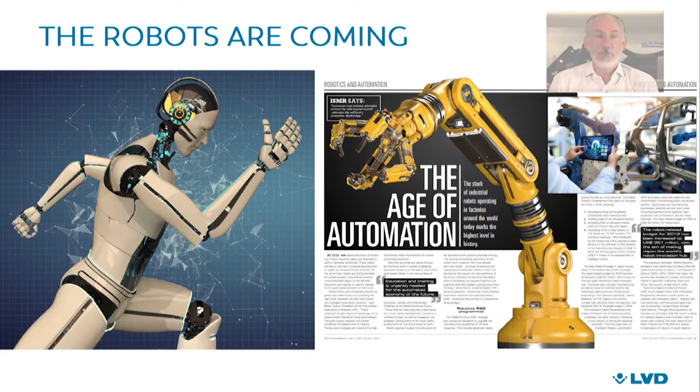The new World Robotics 2020 Industrial Robots Report shows a record of 2.7 million industrial robots operating in factories around the world. In 2019, sales of new robots remain on a high level with 373,000 units shipped globally. This means a slowdown in sales by 12% in comparison with 2018 and reflects the difficult times in automotive and electronics. But it's still the third highest sales volume ever recorded.

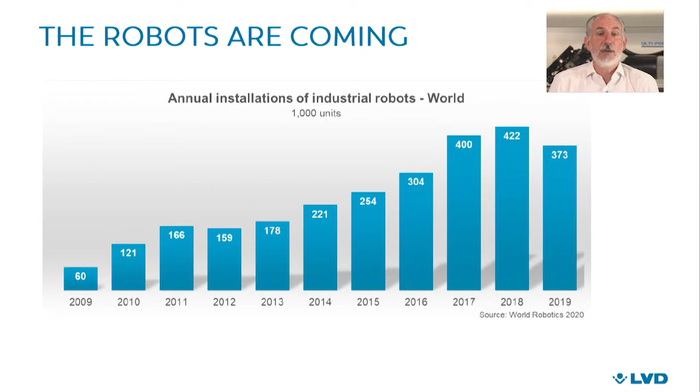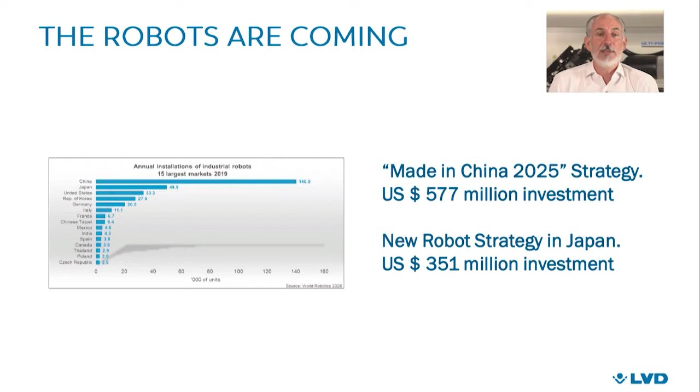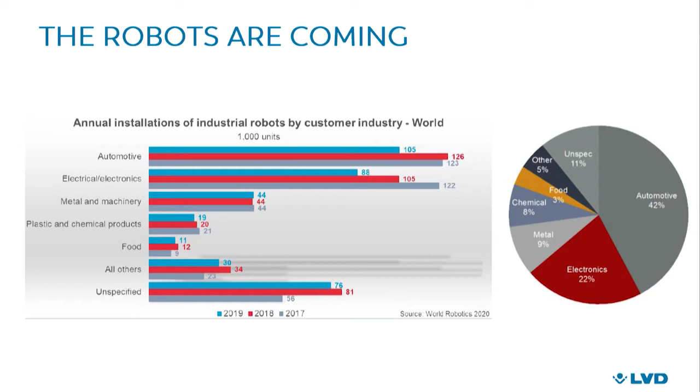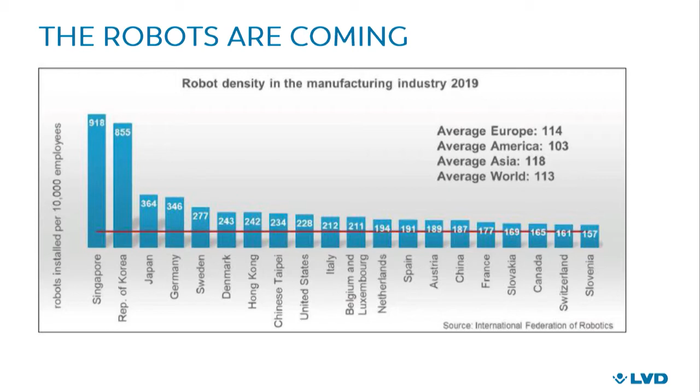Asia remains the strongest market for installations of industrial robots. China and Japan even have incentive programs in place for investment in robots being integrated into manufacturing. The annual installation of industrial robots for metal and machinery industry remained 44,000 units yearly, representing around 9% of the annual sales. The average robot density in manufacturing is worldwide 113 installed robots per 10,000 employees.

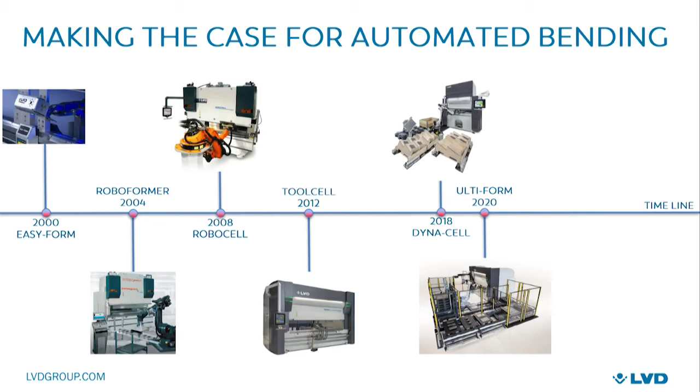All these numbers show that exponential technologies have accelerated more in the last 5 years than they have in the last 50, leading to more and more companies starting to automate. Also, LVD's journey in automated bending has been an interesting one. We have learned a lot in recent years about the demands of automated bending. So, what have we learned and what has changed over the last 20 years?

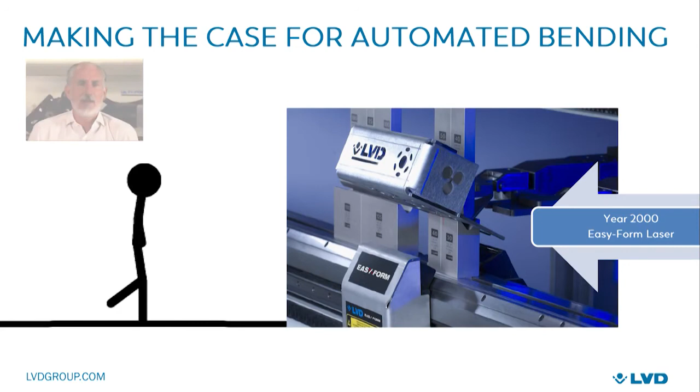In the beginning, we were all walking. Early 2000 was the introduction of LVD's Easy-Form adaptive bending system. With Easy-Form, we eliminate the problem of thickness and grain variation. Automation with inbuilt quality assurance eliminates errors and improves accuracy. In the past decades, robots have only really been seen in repetitive and high-volume applications, only practical for bigger batches due to the fact that robots had to be taught all the moves. Automation was 15 years ago all about simplifying recurring activities by letting machines and software do them for you.

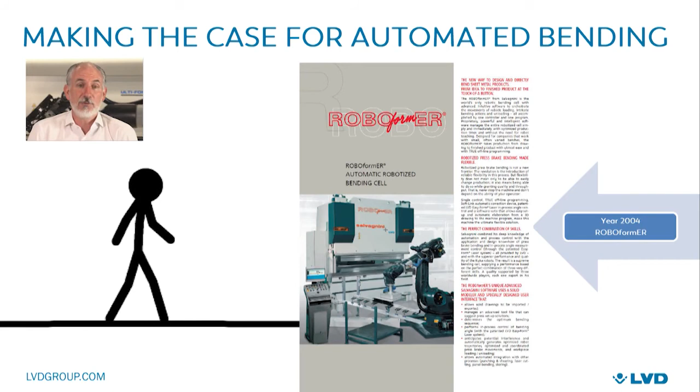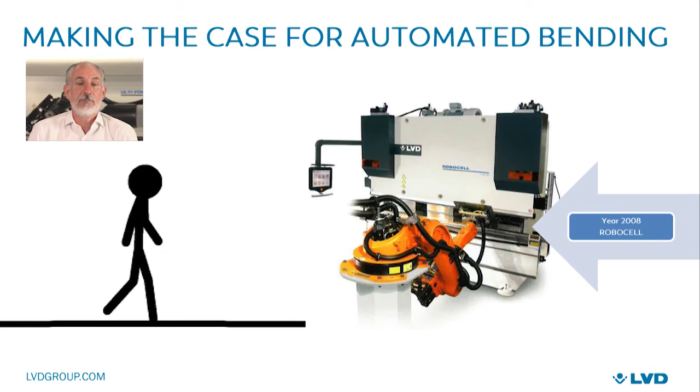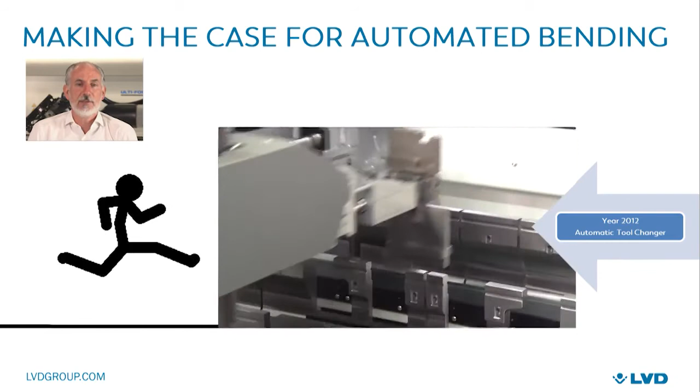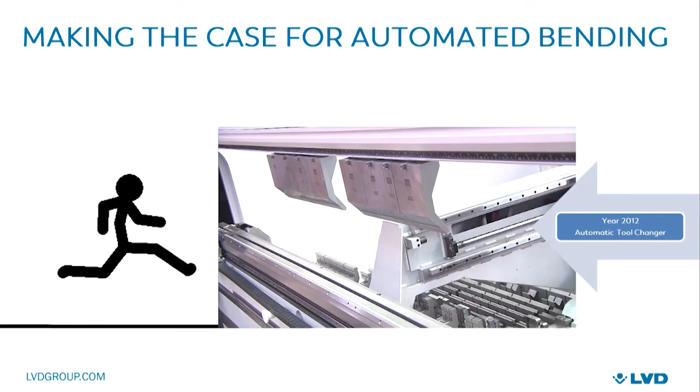What we have learned with products such as RoboFormer and RoboCell is that overall cost of the cell and having a fast and automated programming solution is vital, both points being a restriction of those products at that time. In 2012, we made a huge step with our tool cell. Executing recurring activities on a daily basis gets monotonous for employees. Automation solved this problem and allows people to take up more challenging and rewarding activities, all of this leading to employee satisfaction. Small batch, high part mix, short lead time culture has become commonplace. Our auto tool changing press brake tool cell provides the solution and improves throughput.

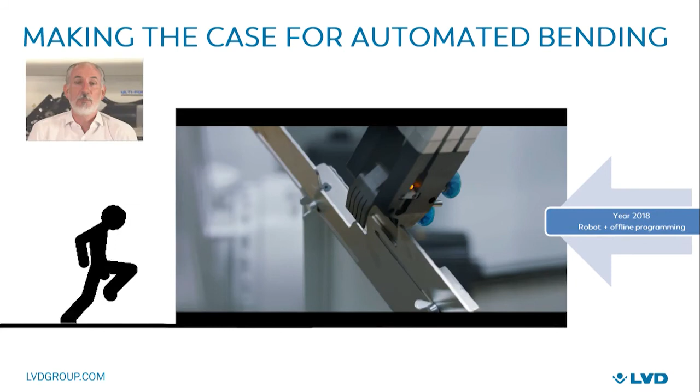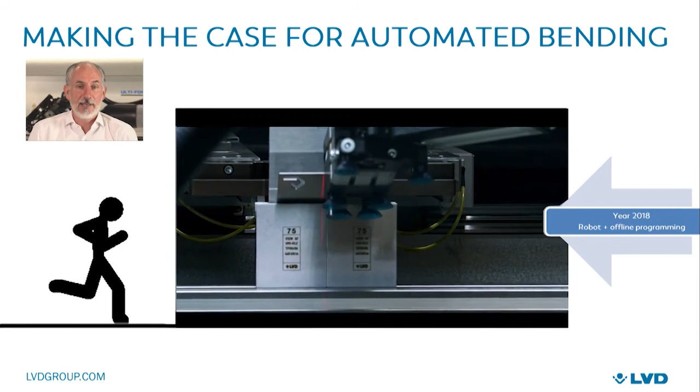In 2018, we introduced our DynaCell with the motto, programming must be simple and automated. In the past, if you wanted to work with robotized bending, typically you needed to employ a highly skilled robot programmer. Today, customers need and demand a programming solution that can program both the press brake and the robot automatically. Today's bending automation customer is focused upon super fast, simple programming, balanced cost of the equipment and shortening the order to cash cycle, whatever the batch size. Almost every company now is focused upon how they utilize their working capital. OEMs are reducing stock inventory and putting more pressure on the supply chain. Therefore, it's all about flow and the speed of the part journey.